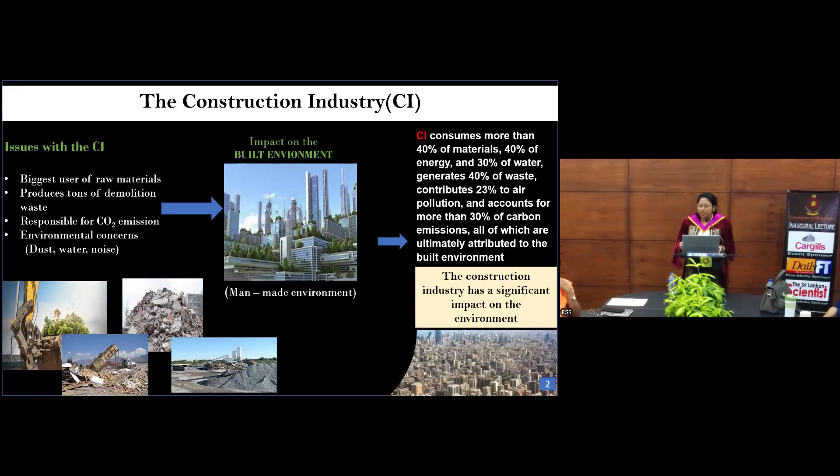Accordingly, the construction industry has a significant impact on the environment. So it is evident that we need sustainable solutions to overcome these issues effectively. Let's see then what is sustainability and sustainable practices in construction.

The most well-known and widely accepted definition of sustainability comes from the Brundtland Commission report in 1987. Accordingly, sustainability is defined as development that meets the needs of the present generation without compromising the ability of future generations to meet their own needs. So accordingly, to create a sustainable future, we are each responsible for our individual activities.

Social, environmental, and economic dimensions are identified as the triple bottom line of sustainability, also known as the 3Ps: people, planet, and profit. So in the construction industry...

To sustain this triple bottom line combined with technological advancement, we emphasize a balanced approach to enhance sustainability efforts. Sustainability in construction often involves effective use of resources like energy, water, and material, reducing waste and pollution, and protecting the built environment.

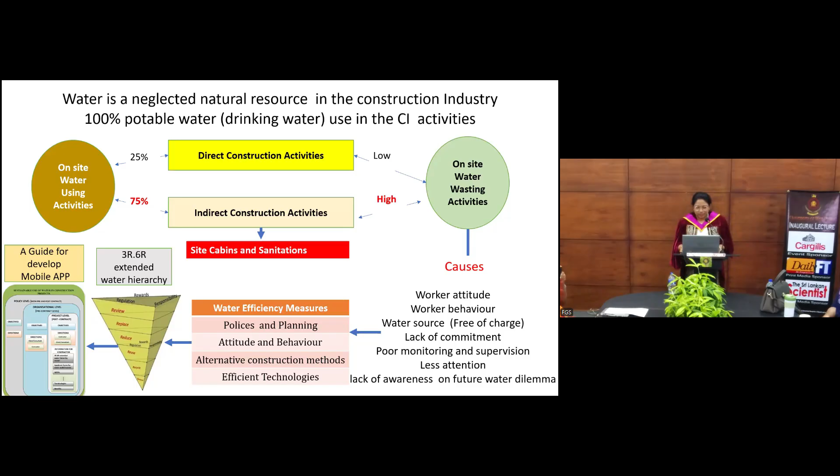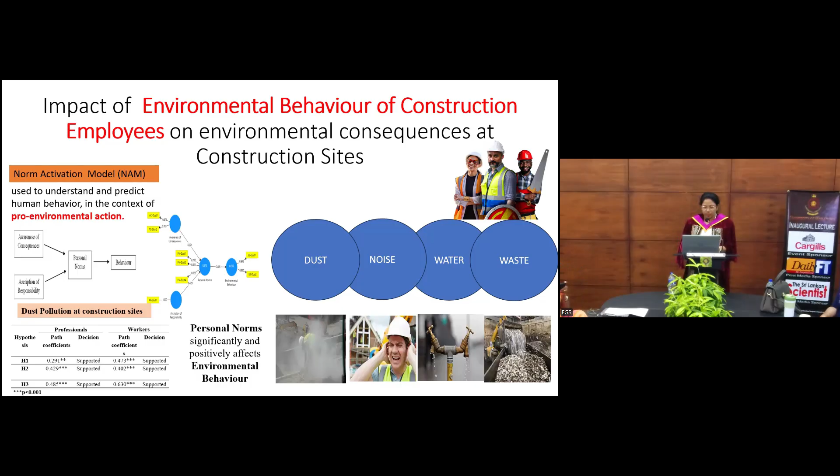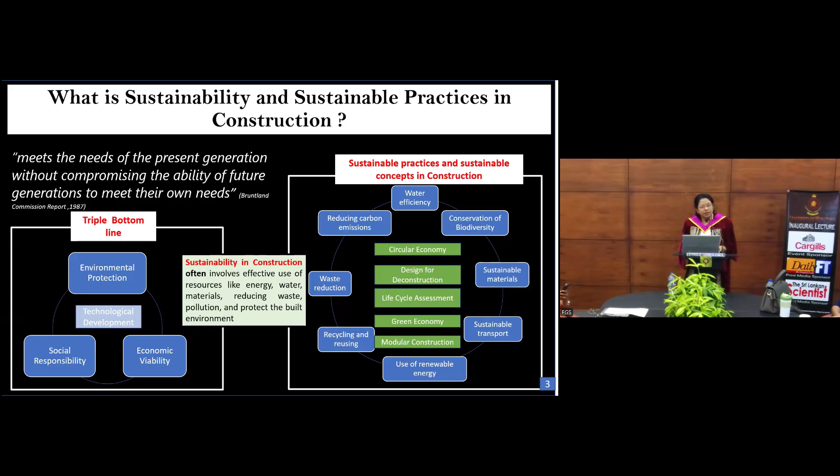Now, the topic I'm talking about today is sustainable materials. It is evident that construction materials play a crucial role in the industry, and the demand for those materials is increasing daily. However, their production, transportation, use, and disposal have a significant impact on the environment.

For example, negative impacts due to extraction of materials can be identified as noise pollution, air pollution, water pollution, chemical emission, release of CO2, damage to ecosystems, and energy use. So we need innovative, efficient, sustainable materials, and eco-friendly construction practices.

So what does it mean, sustainable materials? Sustainable materials are low embodied energy, cost-effective, and environmentally friendly materials. For that, we need optimum use of materials and reduction in waste—carbon emission during construction and operation is significant.

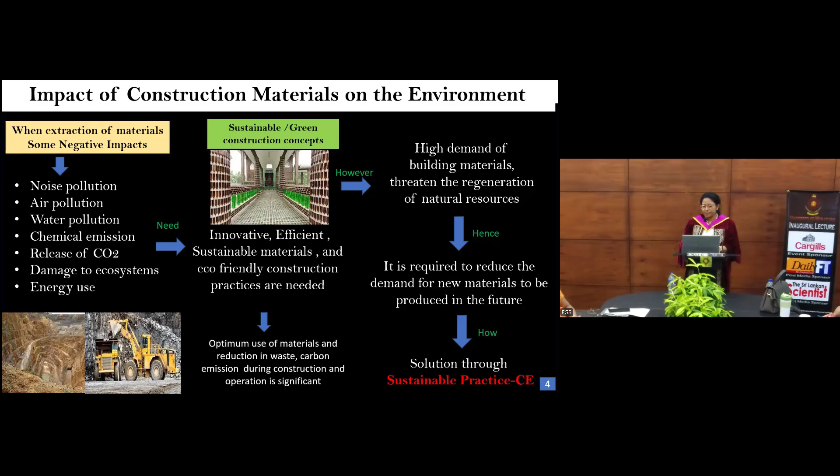What is then circular economy? Researchers have identified that the paradigm shift from linear economy to circular economy is inevitable, with conserving materials. As you all know, the linear economy model is common in the construction sector, which typically considers the take, make, use, dispose approach. The linear model is associated with mass production and resource consumption without considering the physical limit of resources.

The concept of circular economy evolved gradually, shaped by ideas from various scholars and schools of thought. According to environmental economists Pearce and Turner, circular economy is described as a system in which materials are kept in use as long as possible and waste is designed out of the process. There are many definitions of circular economy in the literature.

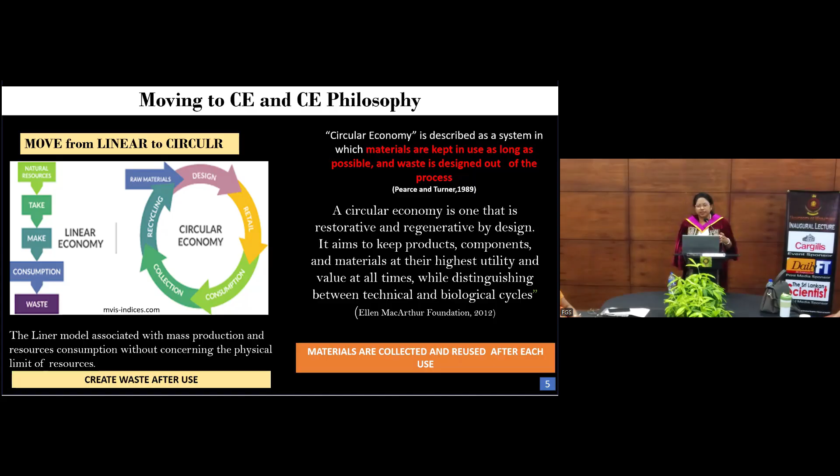Simply, the linear economy creates waste after use. In the circular economy, materials are collected and reused after each use. This slide illustrates what is the technical and biological cycle, also known as the butterfly diagram. In a circular economy, waste is eliminated by design.

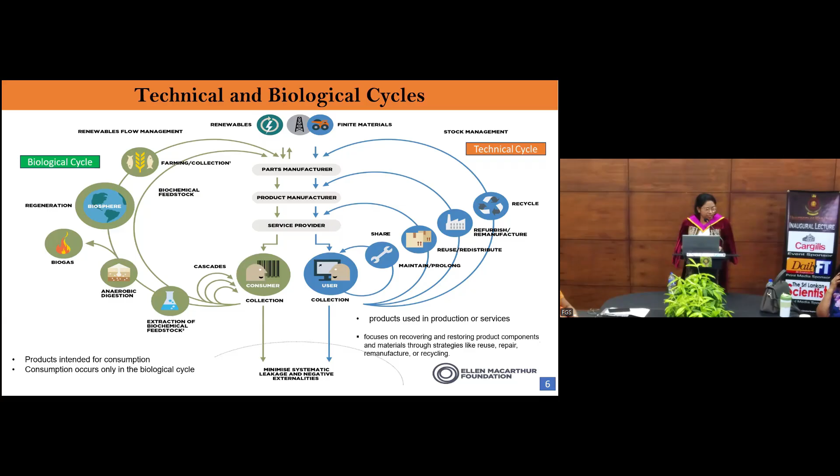The biological cycle is for products intended for consumption, whereas the technical cycle is for products used in production or services. Consumption occurs only in the biological cycle, whereas the technical cycle focuses on recovering and restoring products, components, and materials through strategies like reuse, repair, remanufacturing, or recycling. Ultimately, one of the key goals of the circular economy is to optimize resource yield in both the technical and biological cycle at all times.

Now, what is the difference between circular economy and sustainability? Circular economy is closely intertwined with sustainability criteria, and it can be seen as a tool or practical framework to achieve sustainability objectives or sustainability goals. Circular economy evolved as an innovative paradigm that offers a fast track towards a sustainable built environment, while sustainability encompasses a broad range of economic, environmental, and social objectives.

I have already explained the meaning of sustainability. It often involves effective use of resources like energy, water, material, and also reducing waste and pollution, ultimately protecting the built environment. So it clearly shows circular economy interconnects strongly with sustainability, and circular economy focuses more on optimizing the use of raw materials and offers a waste-free, resilient economic system, promoting sustainable construction through integrating restorative and regenerative systems. Through circular economy, resources are kept in use for as long as possible and waste is minimized, which directly supports the broader objectives of sustainability.

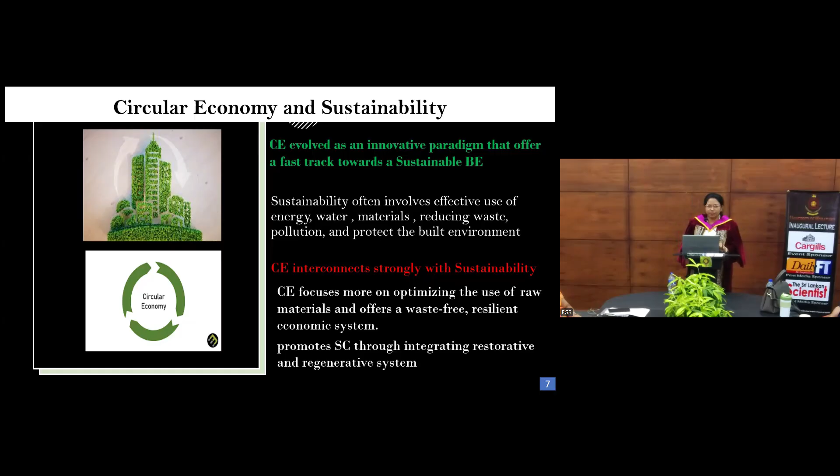If I ask a question: what factors are to be considered when selecting building materials for a building? The common answer is cost, because it is important for the client. Other common factors include strength, durability, availability, transport cost, ease of installation, and aesthetic consideration. But some smart clients sometimes look at maintenance cost, climate resistance, fire resistance, and other additional factors.

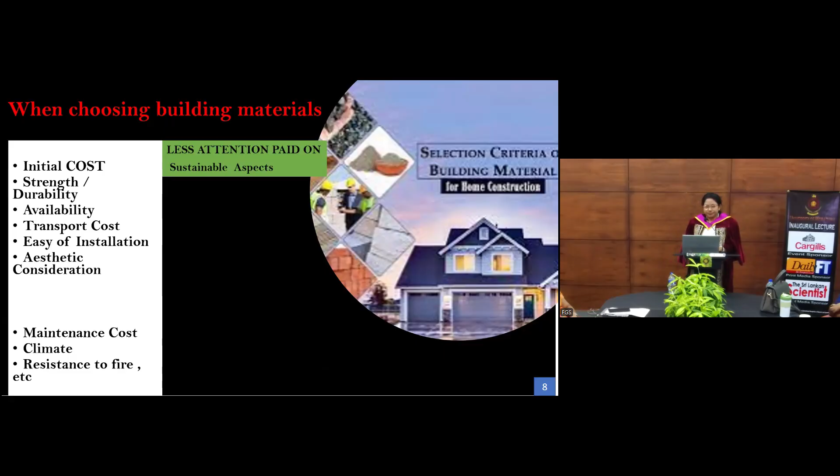Although the construction industry is moving towards sustainable concepts, unfortunately still less importance and less attention on sustainable aspects are paid by many stakeholders while developing design and selecting materials. So how about energy content, raw material usage, depletion of material, adaptability, recyclability, and disassembly? Very rarely considered. So we should change our thinking pattern as a client, as a consultant, or as a developer.

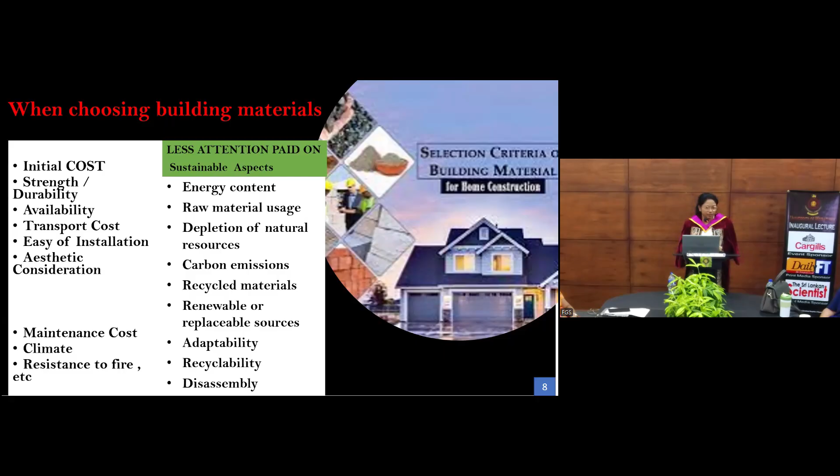This slide shows the findings of research done on design for circular economy. The authors have identified 4 circular building principles: designing out waste, design for adaptability, selecting materials, and design for disassembly. Typically, we know that contemporary buildings are not designed for deconstruction - meaning adaptability or disassembly. But circular economy buildings entail flexibility, adaptability, and disassembly as its scope.

This figure illustrates factors to be considered under each principle. All are interconnected. Out of them, selecting materials will play a crucial role. Why? Because material will impact the other 3 main principles to fulfill circular economy objectives. As discussed, circular economy is based more on resource efficiency and it helps to protect natural resources. So in a circular economy, waste does not exist - consider waste as food.

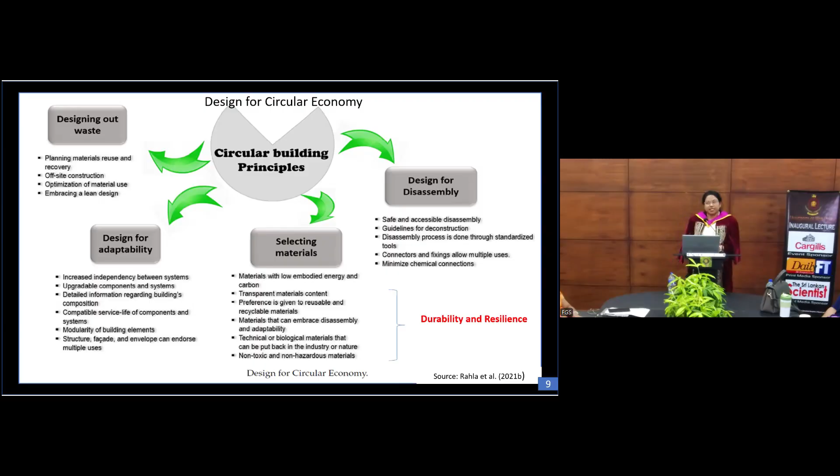So therefore, durability and resilience are two features that need to be taken into account when selecting materials and components.

As explained here, circular economy is restorative and regenerative — these are the main concepts behind circular economy. And 3R, you know what is 3R? Reuse, reduce, and recycle are the common things we practice in the construction industry. Even under circular economy, the 3R approach was recently expanded to include more actions to transition from a linear economy to a circular one. Hence, many more Rs had been added in between. So you can find the different Rs proposed by different authors in the literature, with the eco-design term.

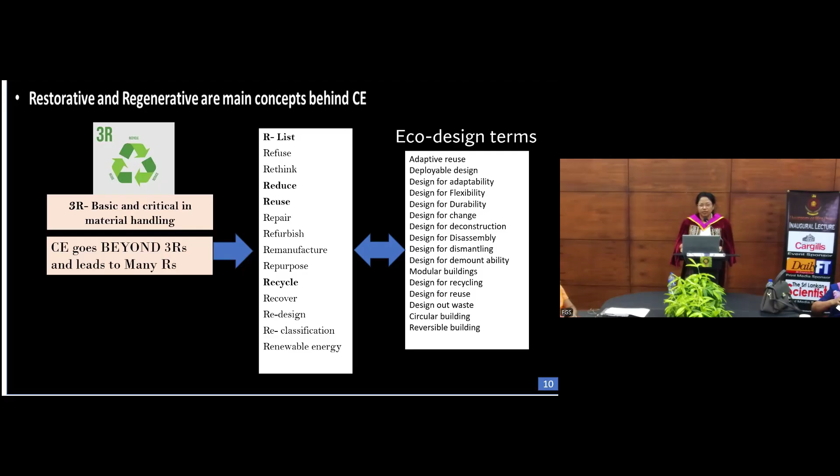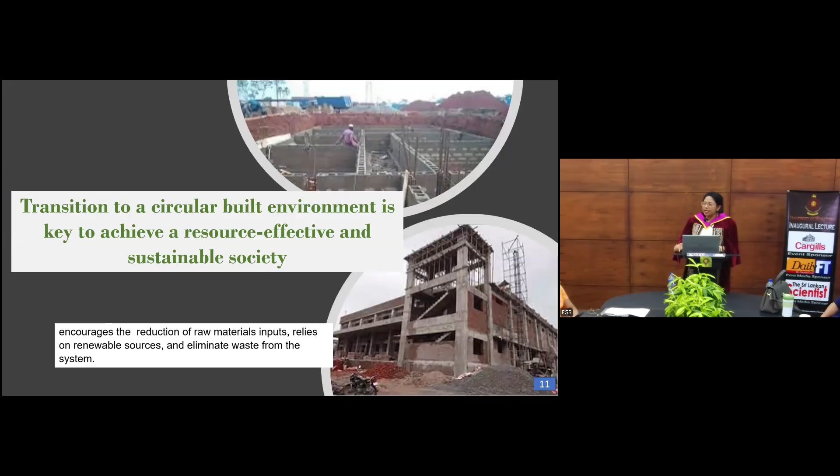So simply, circular economy incorporates principles of green practices and sustainability. Its transition to a circular built environment is key to achieving a resource-effective and sustainable society. It encourages the reduction of raw material input, relies on renewable sources, and eliminates waste from the system.

So with the introduction of the circular economy, circular buildings or closed-loop buildings have emerged as a practice that embodies every aspect of circular economy concepts. These buildings are designed, planned, constructed, then operated, maintained, and eventually deconstructed in line with circular economy principles. This figure clearly illustrates the process of closing material and component loops in buildings, and demonstrates how a linear economic process can be transformed into a closed-loop system.

This is because a main feature of the circular economy is that resources are viewed as a scarce commodity.

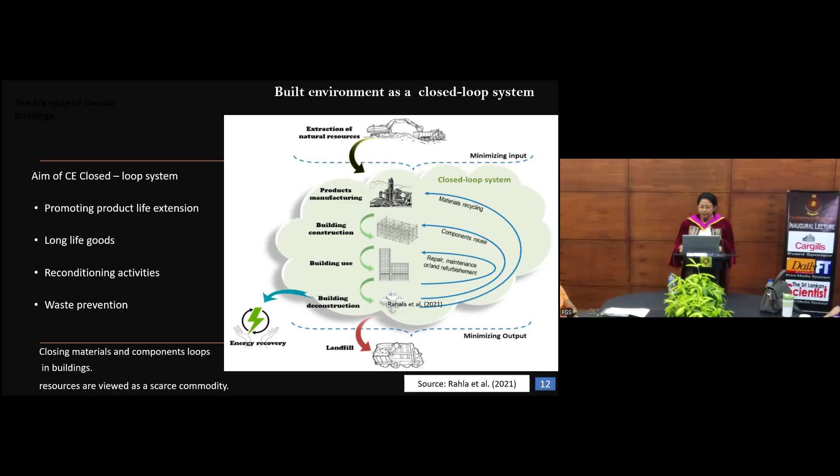As discussed, in this slide I just want to share some applications of circular economy principles in material selection. So as discussed, when selecting building materials and components, it is important to look at their technical and biological cycle while thinking about other factors.

CE encourages the use of recycled products and the recyclability of building materials and components at their end of life. Also, construction and demolition waste are used to produce recycled materials.

One interesting study found that bio-waste and agro-industrial waste have also been identified as a source for producing building materials such as brick, plasters, adhesives, particle boards, and thermal insulation materials.

With the image of the circular economy in mind, many studies have been conducted to evaluate the benefits of integrating concepts and principles around modular design of components, elements, and adaptability.

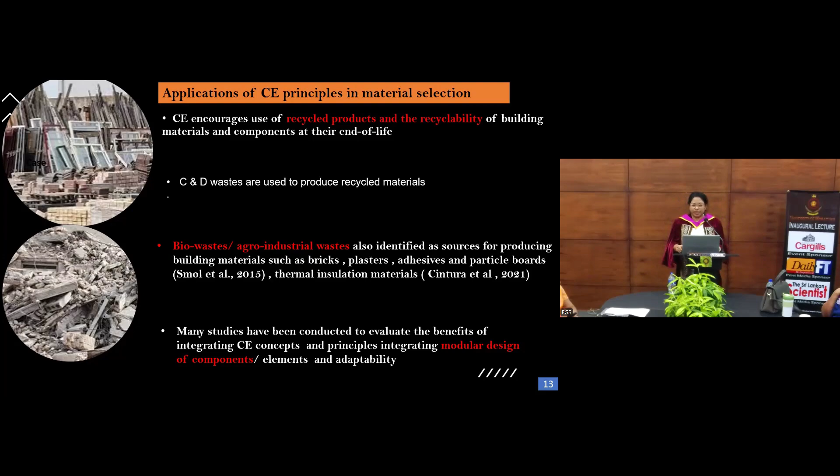So this is one example — by using design for deconstruction, the building designed for disassembly allows for reusing 62% of its mass.

Accordingly, deconstruction and reuse enables saving up to 88% of carbon emissions. Another case study on building insulation materials found that 40% of carbon emissions can be reduced by adopting CE compared to the typical linear supply chain.

So in circular economy building design, selecting remade and bio-based materials for specific applications based on their properties and quality, while keeping in mind the finite nature of natural resources, is paramount.

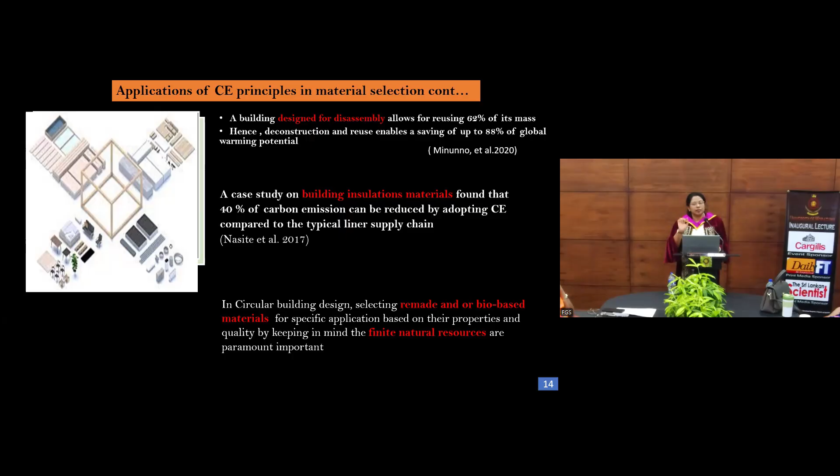Now, this slide shows the benefits of implementing circular economy principles in material and component selection in buildings. Basically, you can see: protect natural resources and virgin materials, then balance renewable resources and avoid unnecessary waste — because waste does not exist within circular economy.

Consider waste as food. And increase building flexibility and adaptability — that is the concept of deconstruction. So products are designed to be more durable, with reduction in energy use and carbon emission. All the benefits stated here are important, and ultimately create a sustainable built environment.

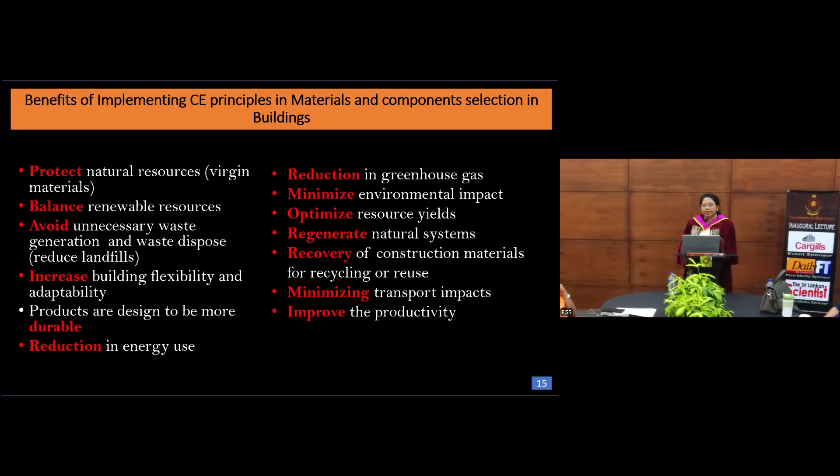Now, this slide shows the opportunities with implementing circular economy principles in material selection. First, a new market for reusable building components. At the moment, we don't have a standard new market for reusable building components. Also, design for disassembly and adaptability is another opportunity with implementing CE principles.

So in the traditional method, right, they have not incorporated those things. With the CE concept, there is opportunity for the adoption of eco-design, and also for implementing off-site construction and modular construction.

Another area is supply chain — so rethinking the construction supply chain. There are new job opportunities and recognition for construction stakeholders. The demolition and recycling business also have to change their perspective: suppliers will become service providers, demolition businesses will become suppliers, and traders in building materials become sector coordinators. So there are many opportunities with implementing CE principles in material selection.

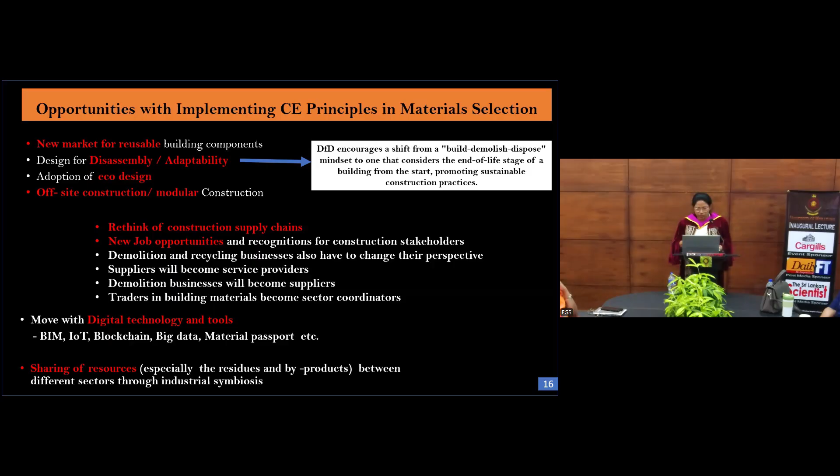So these are the opportunities with implementing circular economic principles.

Translating circular thinking to the building level might be challenging. These are some of the challenges identified in implementing circular economy principles in building materials and component selection. Technological limitation, still as a developing country, is a challenge. The quality of recycled products is an issue too, even though we have more opportunity to build a recyclable market. At the moment, clients are reluctant to deviate from their traditional methods. So we have the problem of quality of recycled materials, no standardized building measures.

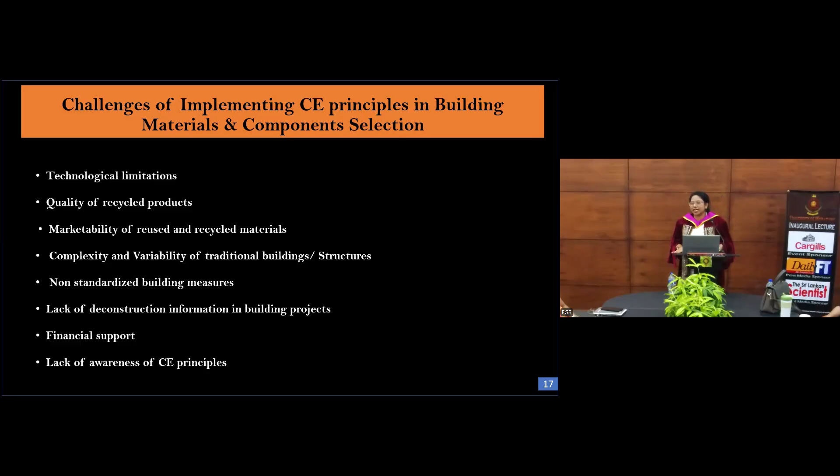Also, this is a very expensive process, so financial support is one of the challenges. And most importantly, there is a lack of awareness of circular economic principles among our stakeholders. So far we've discussed benefits, opportunities, and challenges while implementing circular principles in building materials and component selection.

This slide shows the strategies, how to minimize and face those challenges. We should select the appropriate building materials and components at the early stage, because at the moment less attention has been paid to this. Design toward adaptability and disassembly should happen at the initial, pre-contract stage, which may be the best place to think about circular economy while selecting building materials and during design development.

Another strategy is establishment of relevant requirements for waste and demolition plan guidelines. At the moment we don't have this. We need standards to ensure quality and durability of reused and recyclable materials. Another strategy is development of recovery schemes and sharing information through industrial symbiosis, as I already explained. We need collaboration between industries, so the waste of one product or one industry may become a resource for another.

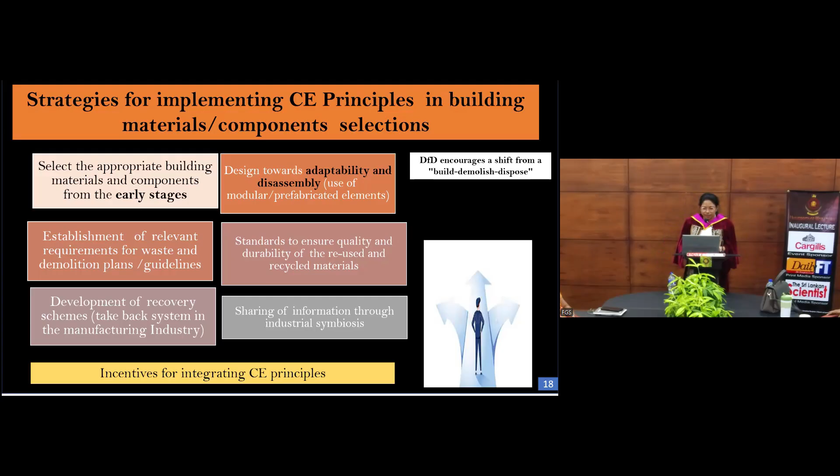And the last strategy is incentives for integrating CE principles. The authority has a big responsibility for that.

Finally, I would say the construction industry has huge potential to implement circular economy principles. Adapting circular economy into the construction industry can promote the successful transition to sustainable construction. A positive mindset of all stakeholders, their collaboration, and standardization are most important.

These are some of the research gaps I have identified. We need more research on sustainable manufacturing, recyclability of materials, building deconstruction, and life cycle assessment. These are some future research directions, and I invite researchers to do more research in these areas.

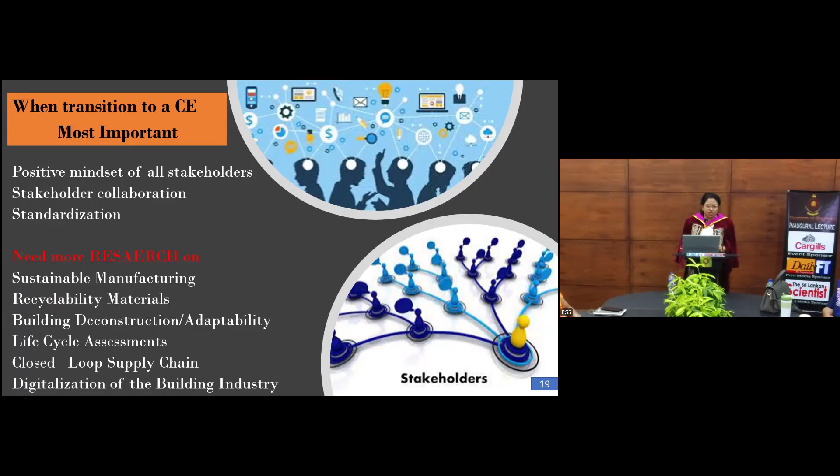So I have come to the end of my presentation. These are some of the ongoing research projects related to circular economy, including advancing circular economy through strategic material selection in design for disassembly, the case of doors and windows.

We know the industry is slowly using bio-based materials, so this is high time to think about that. This is another ongoing research with my undergraduate student. And another area I'm currently working on is a deconstruction information model for design decisions, integrating circular economy in built assets.

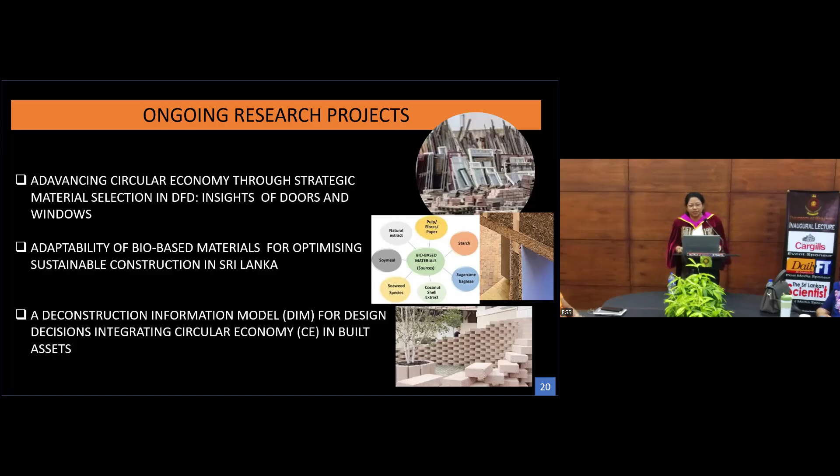With that, the concluding remark: each of us plays a role, and together we have the power to shape the future. Thank you very much. Thank you for listening. Thank you very much. Have a nice day.